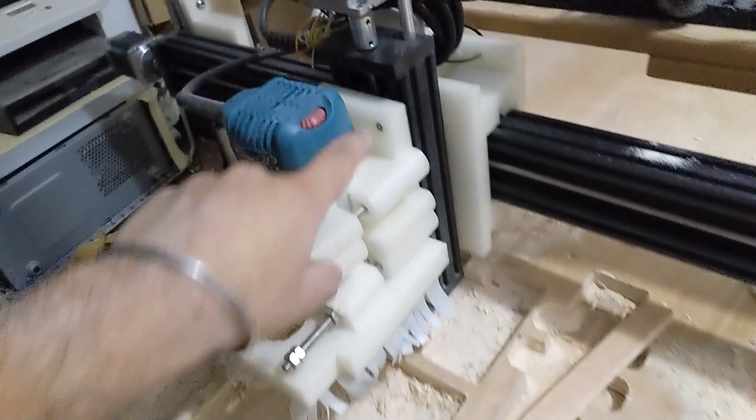Hi, how's it going? So I built this CNC router a while ago, and I'm having some issues with it. But first let me explain what a CNC router does.

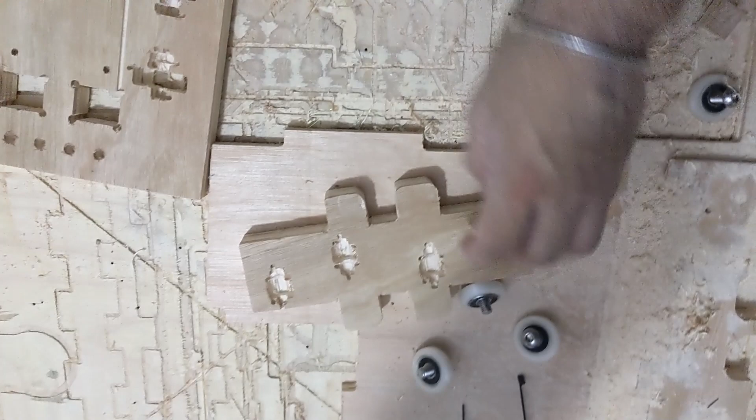A CNC router converts something like this into this. It does that by using machine code to get this CNC to cut out certain shapes. CNCs are generally treated as being amazing and can be used to cut out anything, but that's not always the case.

Looking at my machine here, you can see that the drill head seems to wobble back and forth. It means a lot of my designs are cut out wonky. I'm gonna try and repair it, and I thought it might be an interesting watch to see how it goes. So let's just jump in, to the computer!

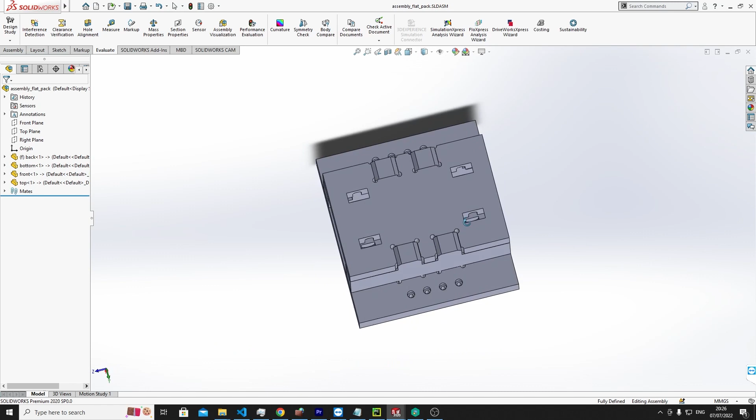So I built this 3D model in an engineering software, and you can see it pretty much explains itself. So the thing I designed is this, and let's just call it a rider. We'll call it the rider.

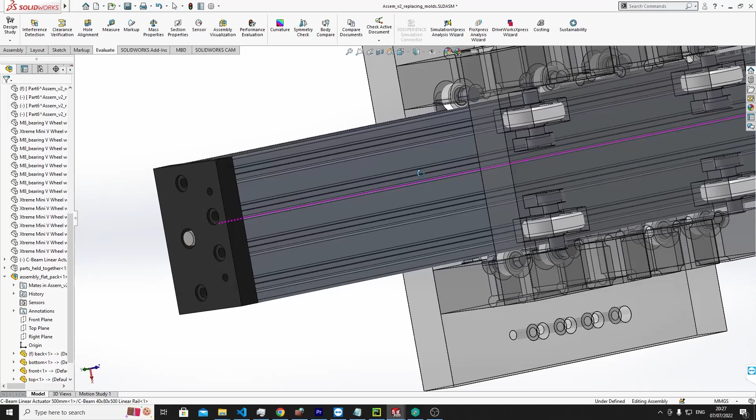The whole thing sits on a rail where there's a motor at the end of it that spins a threaded rod. There's a plate in the middle of the rider with a nut at the back of it. So when the rod rotates, the plate also moves. There's wheels located everywhere on the rider, so hopefully if the rider does move back or forth, the whole thing should stay accurate and not wobble.

The rest of the weird shapes here are bolts and making sure pieces fit together after cutting them out, tabs and slots. Back to reality.

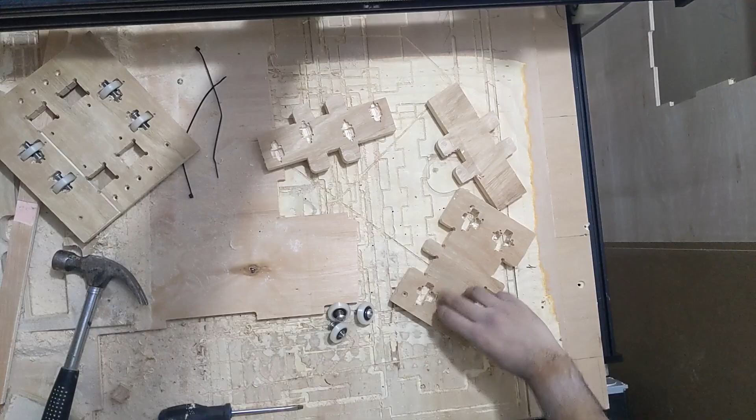So here are the cut out pieces, and you can see the hacked out materials where the wheels fit.

So the rest of me putting this together took a bit of time and was rather boring. So here are some banging tunes to pass the time.

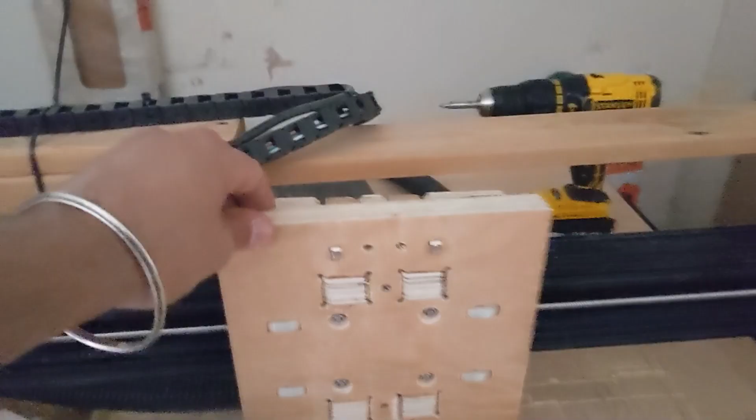Okay, so the rider's on the rail and it's moving. It's alive, the end. Well, I found another problem with this: it wobbles.

No, God! No, God, please, no! No! No! No!

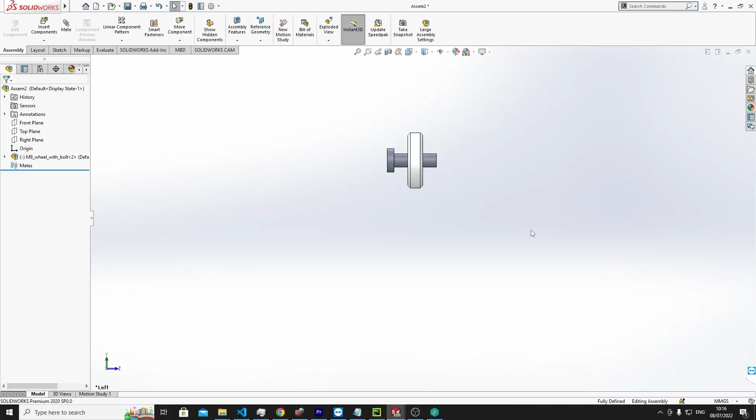Now the idea I had to try and fix this was if the back plate had wheels pushing out more onto the rail, maybe the wobble could stop. So the idea here is pushing the wheels out of its housing more and forcing the back panel to warp whilst being connected to the front, creating this type of clamping effect.

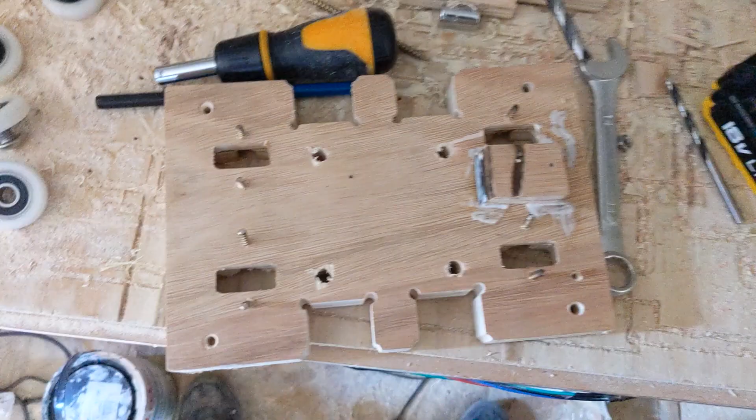And in true editing fashion, here's the back panel fixed. I used screw heads to push the wheel axles out of their housing and with some epoxy to hold it in place. So here it is, the final thing. No wobbles, and it holds all the weight.